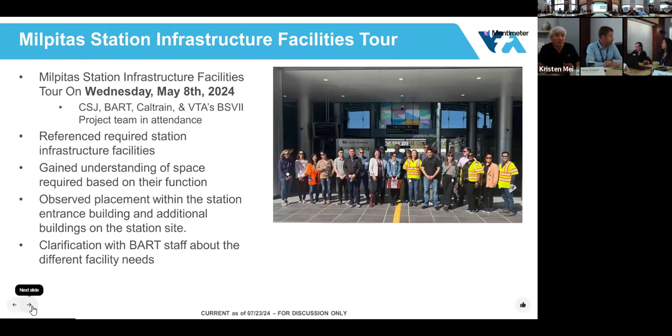Thank you to BART, if there's any BART members on the call, for hosting us and walking us through.

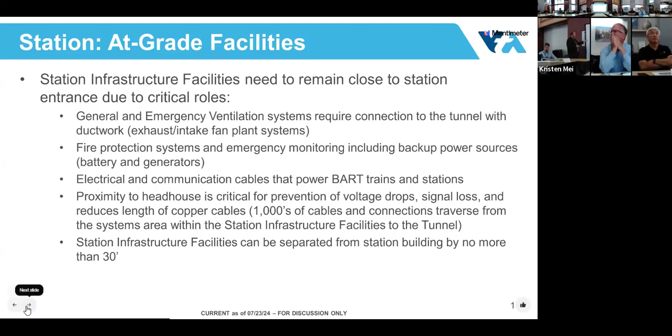The next slide shows all the things that essentially need to be at grade. We have to provide staircases that come up to grade, and ventilation systems that come out to the air. These things have to come up to the surface, we can't bury them. We've got to have fire department access, water valves and things like that have to be in that station head house, some restrooms up there, and our bike storage facilities in that area. Those are the things we're planning for in terms of the overall footprint of the station proper.

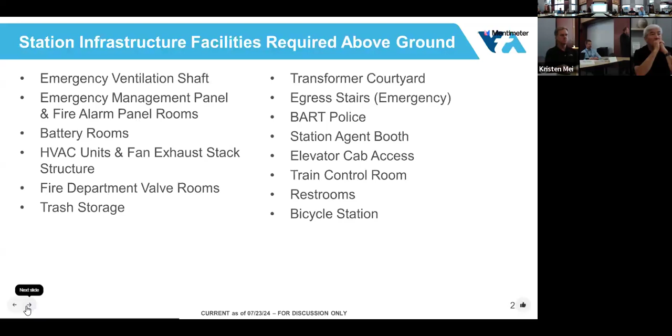Here, Kristen, do you want to help me? Thank you.

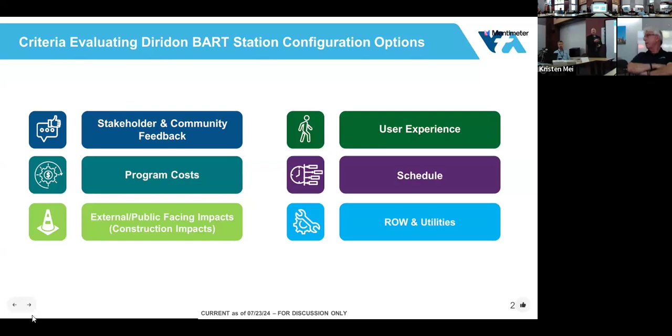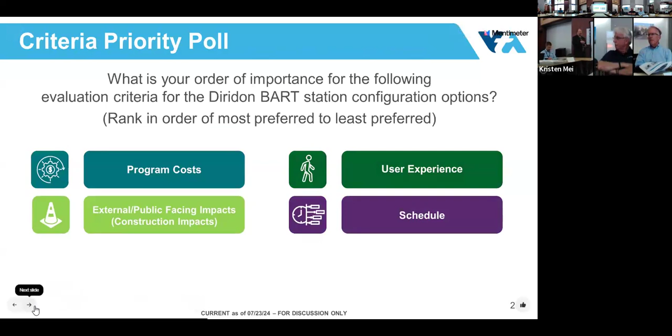So we're going to take a poll right now, and we want you guys to rank in order from most preferred to least preferred what are the things that are drivers for you. And while we're doing that poll, I can open it up to some questions.

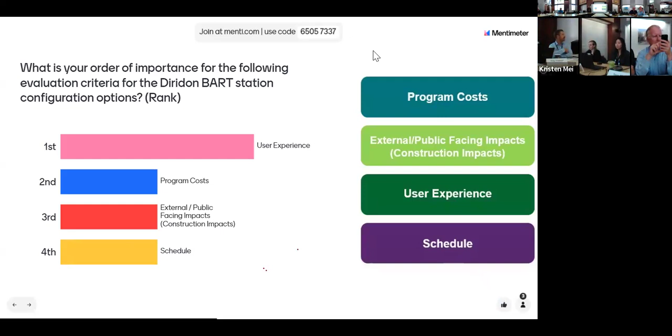I think you called on me to speak, so I'll give it a shot. First of all, I'm having a hell of a time hearing some of you speak in the Chamber of Commerce building. The mic doesn't pick you up all the time when you turn your head away, so realize that.

The second point is that we had at one time talked about an underground passageway from under the Diridon station over to the BART station, lining that with retail opportunities. What you have blocks that, it seems. At least I could not figure out how you were going to do it. In fact, this is all pretty opaque for people who are not there and able to understand what's going on.

So I will respond to the connection to the future intermodal station. We do have that in this presentation a little bit later, we'll get into that, that's the next topic, so we will present that. I will say that we do not have that area lined in retail, but we do have that connection option shown. Seems like you're losing an opportunity there. Do you have to come up out of the station to go across and then go back down to BART? So there's going to be 3 alternatives, and like I say, we have some very detailed slides that I'll show you after we get past the station.

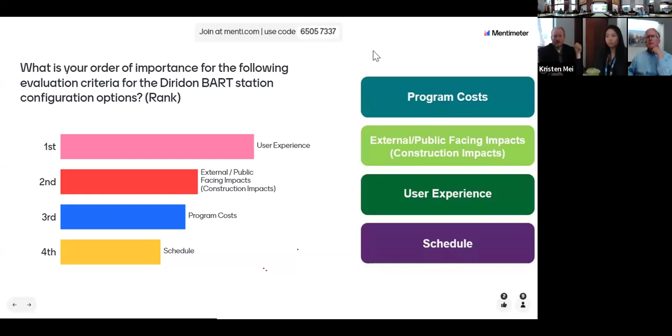Perfect, thank you. Yes, that's a great segue. Thank you for those who provided their input in Mentimeter. We're gonna move along here, but it looks like user experience is the preferred evaluation. And thanks everybody for taking, as Kristen mentioned, keep that app open because we've got 3 or 4 more questions we can use the app to answer. So we'll go on to the next slides.

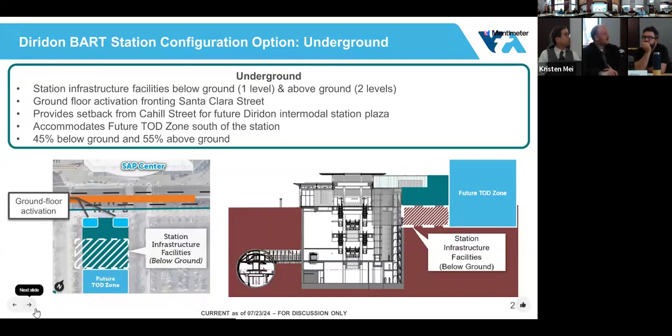Okay. So that's the underground option. We've got about 45% or so of all those critical infrastructure elements I talked about below grade, and about 50-55% above grade. So that kind of cuts it roughly in half. This is the optimum space for us to utilize here. So these are some of the things that those cover.

Let's go to the next one. Again, the next one is essentially an expanded station footprint. So we have a very similar scenario where we've got the future TOD zone. We've got a very large below grade facility, but we actually expand this into Cahill, towards Cahill.

So that creates a much wider structure for the station, which increases the cost of the program. But it does provide additional retail space, and that's one of the things we heard was requested - to provide some additional at-grade retail space. As commented earlier, there's a lot of open retail space downtown and all over the area that we're having a tough time to build. VTA is not an agency that builds retail, but we understand this is a desire of the community, so that's why we're putting this in here for your review.

And we put one square over here on Cahill. We could potentially put maybe a smaller square on Montgomery. It really depends on how this whole thing space plans out. And the TOD gets bigger here too - it would jump up to the 180 feet. So the original was like 150, and now we go to the 180 or so.

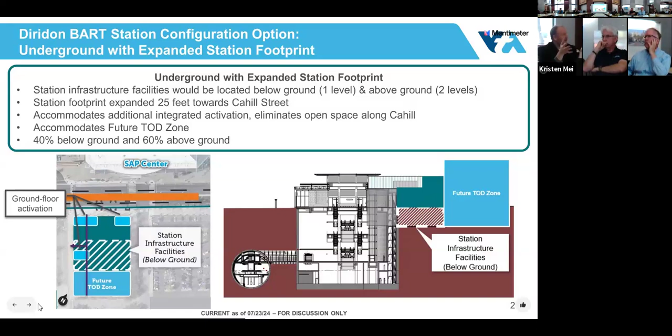Neither of the options remove the functionality of Montgomery returning to a southbound at the end terminus of the project. That's correct, right. So we're only talking about the station kind of footprint, and Cahill plus - yeah, right now. So that's the other option, and we'll go into some benefits and costs for all three. Then the last option was the one that we originally had, which is our baseline.

Again, that brings everything above grade. It's much easier to maintain. It's the least expensive option for the program. All of these batteries and large equipment pieces are at grade - we're able to drive in and utilize them and get them with a forklift instead of a crane. So operations-wise, BART does like this option the best because everything is at grade and easily accessible, instead of having things like elevators that need to take it down to the basement level.

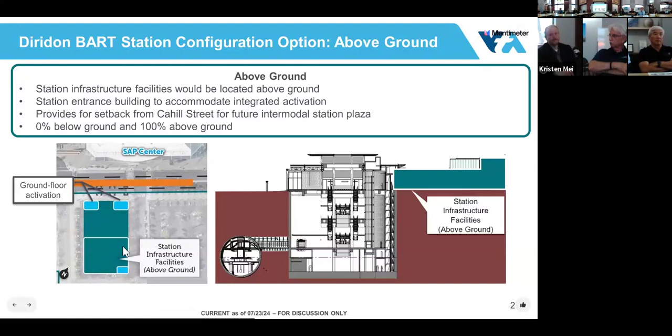We do try to optimize as much as we could in terms of retail space. Again, we do have the ground floor activation along Santa Clara as well as a small area over here. Then there's also some bike parking in this area here as well. So those are the three options we currently have. Let's go to the next slide.

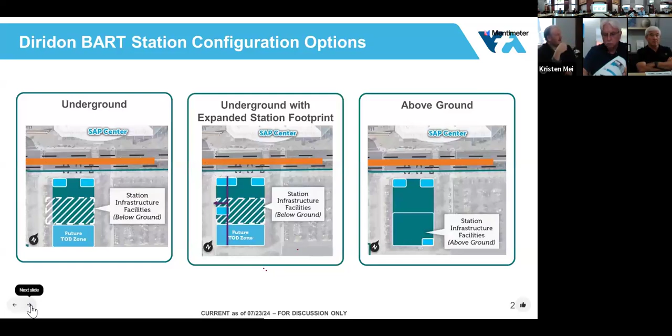Those are the three options we talked about. Let's go to the next slide, which talks a lot of information here. The underground scenario in terms of cost does cost quite a bit more than the above grade option - we're looking at approximately a $30 million increase by having this basement level. If we go with the widened footprint, then we're at about $50 million or so. So these are kind of significant impacts to the program. We've got a slight schedule increase in terms of just implementing this design configuration, but it would not delay the start of the job. We think there's enough float in the station construction itself that it wouldn't actually delay the opening day - we would just eat that schedule through the other activities that are happening.

We know that you guys reported back that the user experience is one of the primary drivers of this, so we've got a lot of user experience here that we talked about. The underground option does provide, with a lot less of this infrastructure at grade, a little bit more TOD, a little bit more community activity happening at grade. So that definitely is a positive, and it also allows for more of that TOD opportunity.

So those are the things that we've been weighing—the difference in Cahill as a user experience option, right?

Yeah, so one thing that we do think the underground scenario provides that the underground with the expansion footprint does not is a wider pavilion, a wider plaza on Cahill, which allows for more queuing and lines for people entering the system after events. With that wider paseo, people entering those fare gates can queue more easily—it'll be a lot more user friendly. Once we eat that space up with this TOD, you'll have a lot more congestion. So at least for day one, it's definitely easier to have that open public space between the station and the sidewalk. It'll be about 25 feet.

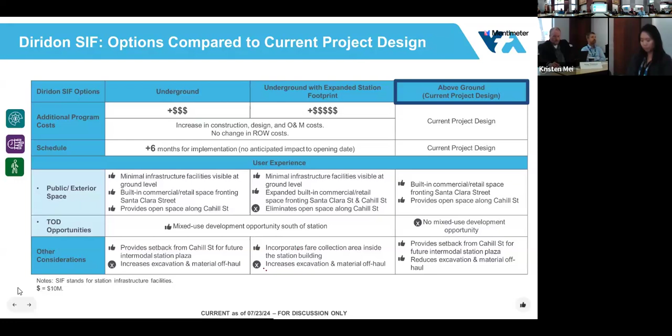And with our industry supporting those trips with money to the people who use them, that's going to convert a whole lot of ridership into the Diridon station that don't have a place to go. They've got to get to their jobs in Silicon Valley, not in San Francisco. A few will, but the majority are going to go to jobs in Silicon Valley, and they're going to need to transfer to Caltrain, the Altamont Express going the other direction, and so on, and light rail particularly, taking them to local jobs and buses.

What you've shown here makes it very difficult for that transfer to occur. You've got a blockage in the opportunity to have people come across that area in a tunnel, so there'd be direct access from light rail, which will be the heaviest used transportation mode in the future, to the BART system. Instead, you have to come up out of the ground, walk over, and then go back down into the ground. That's going to just frustrate riders, which we've all indicated is the optimum objective.

And when you talk about saving a few bucks, $50 million is chicken feed compared to what you're going to have to invest in the future to make this area reach its potential. You need to be designing for the long-term future, not for a budget constraint that's tomorrow. You got to fight through then and get your politicians out there to find the money, run the campaigns and find the money, but build to the optimum. This is discouraging to look at.

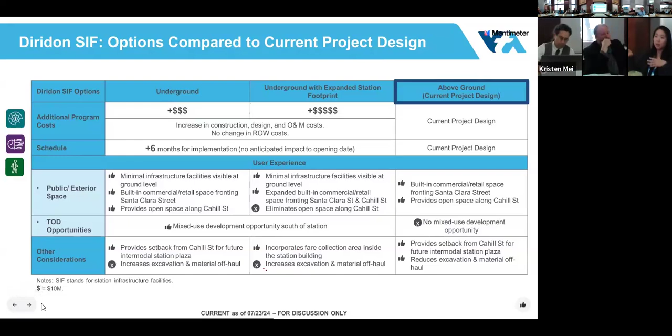Again, I've already covered most of this. Let's go to the next slide. So, in these three options, can you tell us what are the specific elements that you like between the three?

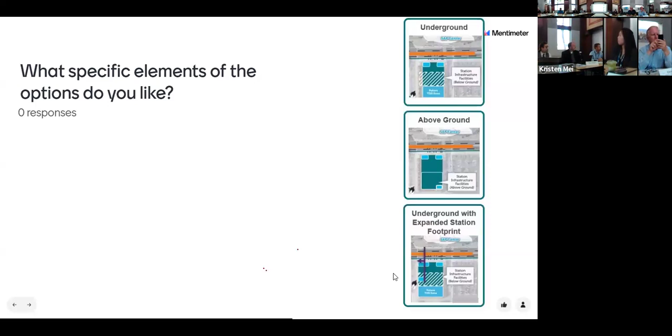Again, the underground does provide for the future TOD. The above ground does not. And then the underground, the last one is the expanded station footprint. If you guys can just focus on the station itself, we'll talk about the connection to the future Diridon station, or to the station expansion next. But this is really related to the station footprint itself, just within the footprint. This is meant to be a little bit more open-ended, so like retail or open space. You could use one of the optional words if you want to describe those features that Greg talked you through.

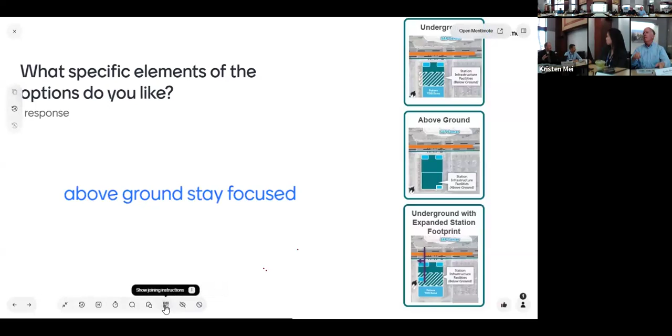Okay, so we're seeing residential TOD, so those are drivers. Above ground, stay focused. Okay.

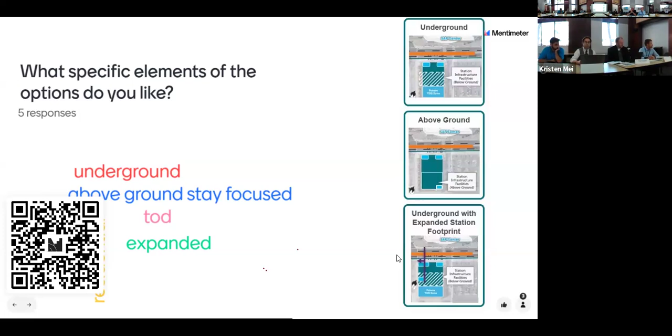These are words that we want to take as feedback to help the designers incorporate into the next iteration of what the station will be. We'll give it one more moment here.

Maintain current footprints, underground is highlighted and larger. That's getting a little bit more weight.

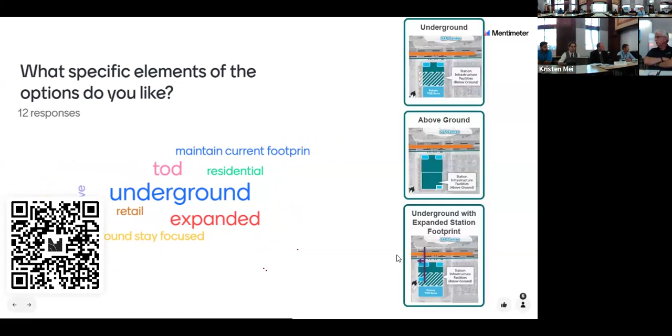Connectivity, like global trains. This is good. Awesome. I think we're going to have to move on, but thank you for that feedback. Appreciate it.

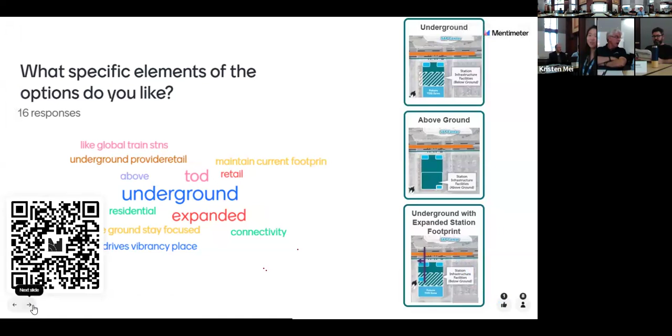Okay, so based on that, I guess this allows you to select which of these provide the best community-based solution. So if you would like to pick one over the other, you can select one, or you can select two, or you can select all three. Yes, you can select all that apply, so we can figure out how to do that. Or you can narrow your focus if you really feel strong, right? So it tells us all will meet the needs, or no, we think you should focus maybe on one or the other. Help us narrow it.

I was gonna pick both underground and underground expanded, but I couldn't do both, so it wouldn't let you multi-select. Oh, you just select one. Yeah, just for me. Was anyone else able to multi-select? No. Right, looks like it's leveled out. Thank you for that input there.

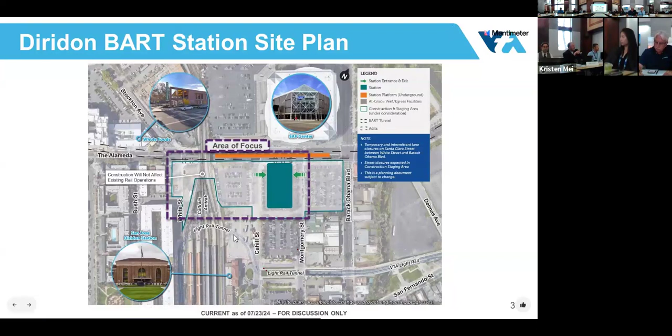So that's the current option, would be to do that. You exit out of the high-speed rail trains or any of the other Caltrain or other intermodal facilities, you walk across and then go back down into the tunnel.

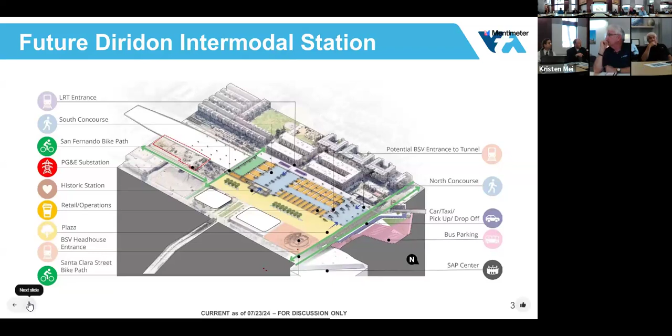So these are the 3 options. They've got a stacked scenario where the platforms are all above here, and then you have a connection where you walk out, walk across the pavilion, the plaza area, then go down the escalators and get on BART. So that would be one alternative, the above ground alternative.

The second option is the below ground alternative. That's when the intermodal station is a little bit lower, and they would provide an underground passageway that would lead into the basement level, the first level basement of the Diridon, of the BSV station. So that's option 2.

So the first option is at grade. The second option is they come in and tie into our head house. The third option would be for us to build our station platform in the tunnel a little bit longer and put a future connection point into that tunnel, allowing for a direct connection into the Diridon intermodal facility, using a gate. There would be a new station entrance area up there, installed as part of the future work.

And that would be from above grade, right? So we've got a cross section for that too, which shows that this is going to be a fairly deep connection. Then there'd be staircases and an elevator that come up, and escalators that come up to the intermodal station over here. So those are the 3 options.

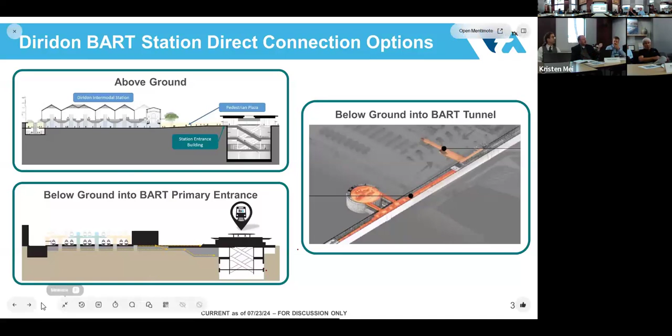And figure out how long it's gonna take to walk. Yes, we did. So is that faster or slower? Go to the next slides, we can talk a little bit about them in detail. Again, this is a blow up of that area. Keep going. Let's go to the slide with all the alternatives on it.

So the below ground BART tunnel alternative has the shortest travel time. If you have the above grade scenario, I think it's about a minute longer—a minute 20, I believe it. The Diridon intermodal did the modeling, and for the direct tunnel connection, since you're connecting to that extended platform, that's the most direct connection.

Oh, so that's the one that looks like it's long? It looks long, but since we have that extended platform, they're connecting directly into that. So based on that, the direct connection saves about—and they've modeled the entire station—but on average it saves about a minute 30 over the other options.

The below grade primary and the above ground are quite similar, because really you're walking from the intermodal over to the BART station either at grade or below grade, but a similar travel distance. Slightly quicker below grade, you save a bit of vertical, but then you're coming into the main BART platform rather than an extended platform, which is closer to the intermodal station. So any other specific questions on these, or should we go through the voting scenario?

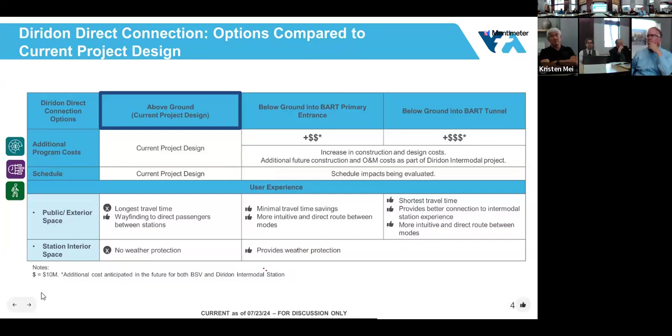And if people were to leave the station and come out and see they had retail available, some place to eat, the arena's across the street, there's a plaza—there'll be so many welcoming elements at grade. It may be worth considering a little more seriously, just for the experience itself, instead of just being in a tunnel the whole time, getting off a train and getting onto another train. Some people may have an hour before they have to catch a train, and I'd say being above grade would allow them to experience a bit of San Jose.

Are they mutually exclusive? Like, can you walk above grade if there's a tunnel? Yes, absolutely. So you can leave the Caltrain track, go out to the tunnel, the plaza area, and then go back in and take this entranceway if you wanted to. So they are not mutually exclusive—you are not locked into one certain area. Once you get into a BART fare gate zone though, then it costs you money to get in.

So yeah, if we did provide for the below grade scenario, as the gentleman on the call just mentioned, you could still do the above grade. Sure, you could absolutely do that.

If we don't make a decision to provide this direct tunnel connection now, we will not be able to do it in the future without a significant impact to the railroad's ability to operate. So that's one of the decisions we need to make fairly quickly - if we're going to spend the money on this, because if we don't put these steel liners in, if we don't extend the mezzanine, if we don't build out that interior elements, then we won't be able to do it without shutting down the BART system 20 years from now, which might take a year or two of operation, which we definitely do not want to do.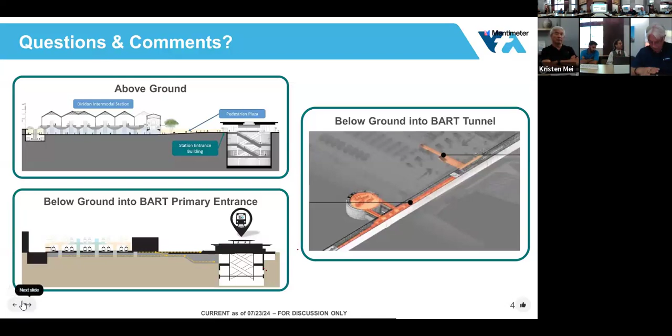Okay, we do have some feedback we can give here. So which of these options provides the most community-based solution? And it looks like you can only pick one, so choose your decision wisely. And if we want to open this up for additional feedback, maybe we can do that after the poll, because we did intend for you guys to be able to pick multiple solutions if you did want to do that. Can you give us the code one more time? I jumped out. Yes. Thank you.

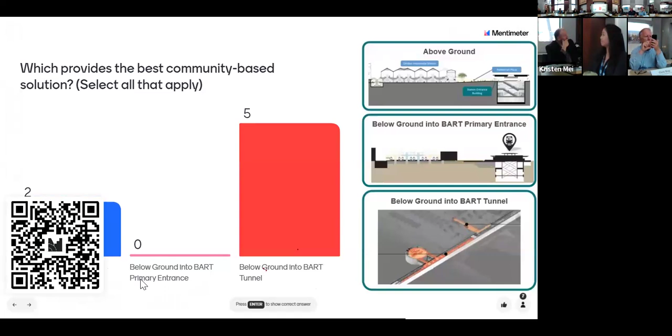There's a comment in the chat - look at the Dey Street Tunnel in New York City for a comparable example of an underground tunnel connecting two transit hubs. Right, looks like we're settling out here. Thank you.

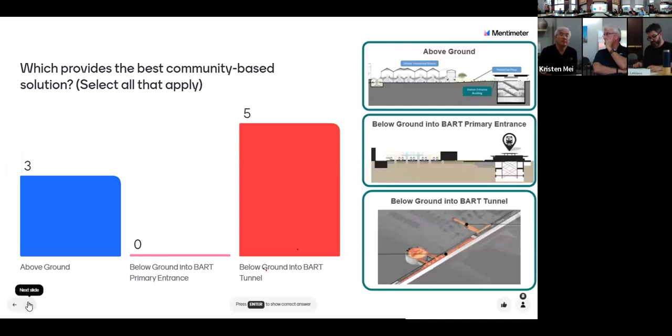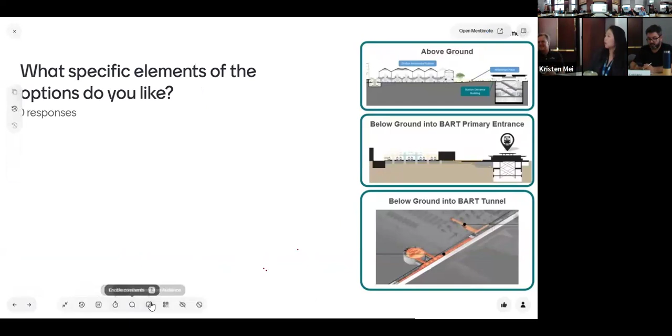Our next question: what specific elements of the options do you like? This is also that same word cloud format - if you like the plaza, if you like the tunnel. Anyone - the experience, the travel time of the user, is it the welcoming San Jose environment, what a plaza offers, speed of transfer, direct connections, outdoor experience.

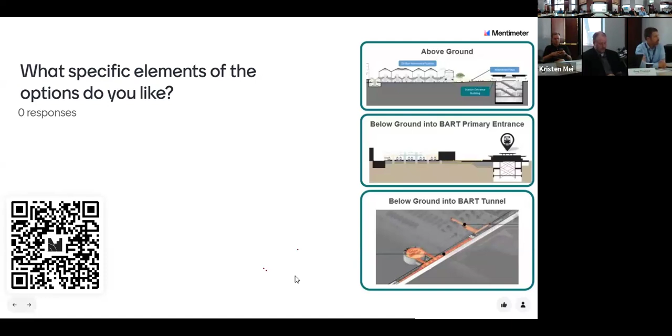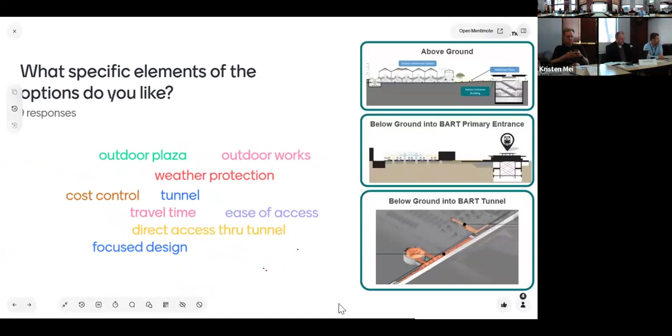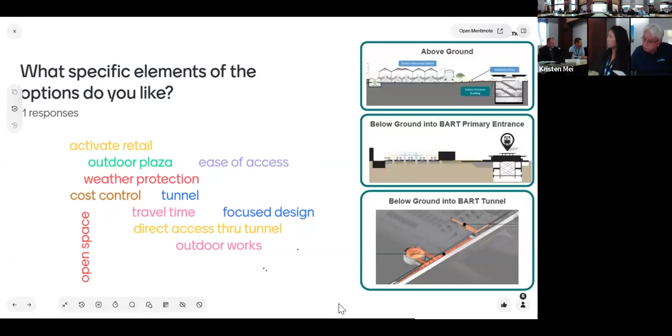Weather protection, tunnel, travel time. Cost control, and I assume that relates to the cheaper options. Ease of access. Outdoor plaza. Open space. The idea of activating retail or commercial space that can be leased.

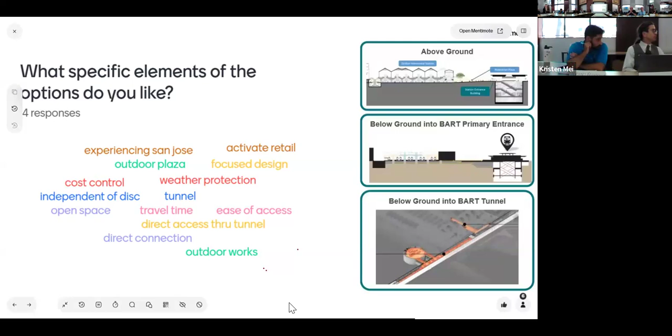While people are filling this out, we talked about capital costs, but there's also an operating cost element for any underground connection, correct? Yes, absolutely. So there's definitely a capital cost and an operating cost to have the tunnel. And there's future costs, right? Maintenance. There's going to be a lot of future costs for those underground connections that we wouldn't have if we just have the at-grade scenario.

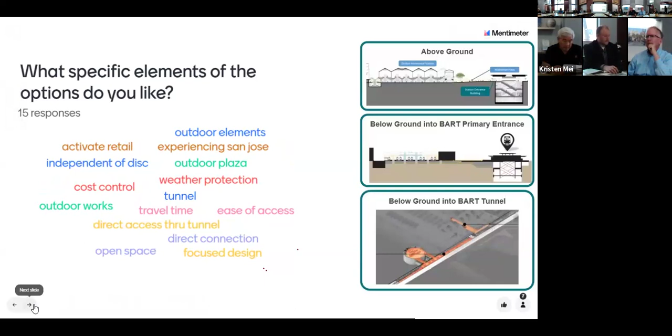Can any of you hear them? Yeah, go ahead, Rob. Nobody can hear you talking when you talk quietly and don't talk into the microphone. Is that for me or for Kristen? You can hear you, you're pretty loud, but Kristen, I can't hear her at all. I keep giving her the signal that I can't hear across the room, so you have to speak up, Kristen. Yes, I will yell, that's my term for it. Thank you, Rob, that's coming through now.

Okay, I know we have 2 minutes here, apologies if anyone has to hop off. We do have 2 more brief sections. Adriana is going to present an update on our downtown station specifically. Appreciate all your feedback for the Diridon station. I know that was a lot of options and information to take in. So Adriana, over to you.

Thank you, Kristen. I wanted to provide a brief update on our current status for the downtown station. There are 2 key elements that came out of the VTA Board of Directors referral. The first is ensuring that the head house, or station entrance building, strives for the highest level of iconic, context-sensitive design, including art and design cues from the surrounding downtown communities. We're addressing that request for the current station entrance building located between Market and First Street through our established design review committee process.

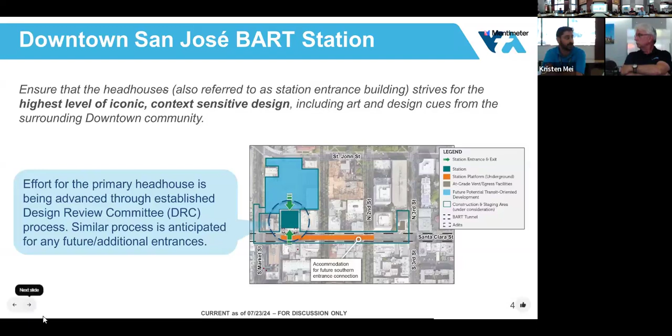We anticipate that any future station entrance for the downtown station would also go through a similar process. Right now we're really focusing on that station entrance building, and we've initiated that effort. For those not familiar, the design review committee is a group that meets to provide input on various station design elements, including aesthetic treatments, material finishes, landscaping, lighting, and potential location and integration of art. The actual installment of art is separate from what the FTA program can and will pay for. We went through a similar process back in 2021, which is where a lot of the renderings you've seen over the past years came from, and we've made some updates to our station designs, so we've reinitiated this effort.

For the downtown San Jose station specifically, the design review committee members include representatives from San Jose State University, the SJDA, the Chamber of Commerce, the Downtown Residents Association, and 3 San Jose staff members. We held a first meeting last June to gather input, feedback, and direction from our DRC members. Tony was one of the members who participated on that call, and I wanted to give him a few minutes to share his thoughts or feedback from that initial meeting.

Sure, thanks Adriana. This is really an impactful station for us, the Chamber, because it's across the street and in the center of the downtown area. So we looked at some options and really liked one that popped up, a section with a barrel vault. It emulates a lot of things around town. We had domes at the cathedral, that's a project of mine so I'm very passionate about it. The old courthouse used to have domes too. So we have history around domes in San Jose, and having that curved ceiling or roof structure helps with drainage.

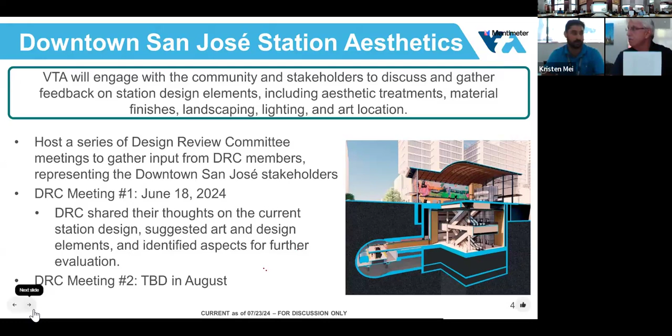And we'll make sure to come back to this group and continue to provide updates as that process advances. As Tony mentioned, some of the key themes and feedback that we received are, what makes San Jose Station unique? This is going to be a gateway to San Jose Station for many. How can this be celebrated in the station design?

Past feedback that was provided was celebrating the actual structure of the station. So our station is a very similar design to the Diridon in that it's got a large circular drum. You'll have two escalators to get down to the lower point.

As Tony again mentioned, there was a lot of discussion about how we use light at the station, both natural light, making sure that it's being used to provide an environment that is enjoyable for passengers. Also as part of wayfinding, to let people know when they get out of the train and out of the tunnel, they'll see natural light and it'll help them get back up to the surface.

We also talked about artificial light, and one of the things in particular that was mentioned is San Jose's illuminating downtown effort. So wanting to make sure that this station contributes and participates in that effort. Making sure we're looking at this not just from the daylight standpoint, but what opportunities there might be to really activate the station in those darker hours.

And then we talked about some of these grand gestures and making the station iconic and timeless. Tony, as you mentioned, some of these arches and domes are something that we have seen in San Jose, as well as some of the other stations around the world that have stood out and really stand the test of time. So that is some of the feedback that we are working to incorporate.

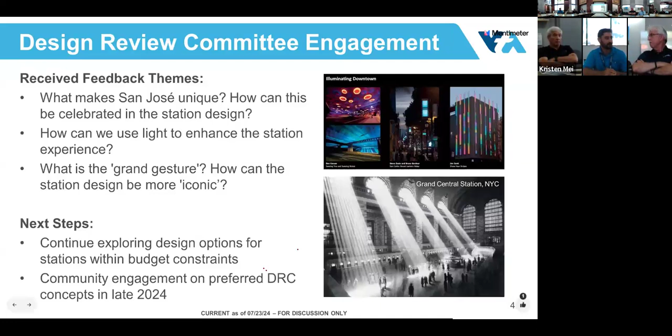But we'll continue going through this process, and as we did with our 2021 effort, we'll work with the design review committees to identify a few key concepts that we then want to bring to the larger community, and we're anticipating that will happen later this year.

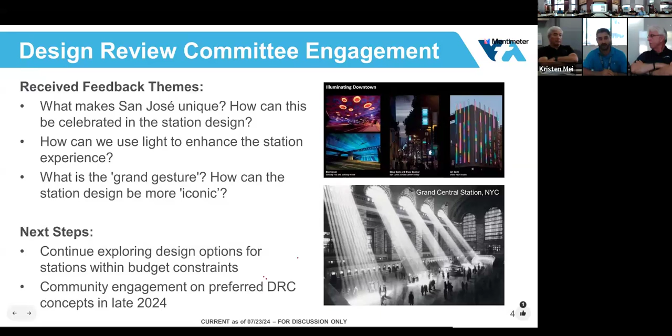The next part of the VTA Board of Directors referral was to really look at opportunities for a south station entrance. So that would be an entrance on the south side of Santa Clara Street. We recognize there are a lot of activities and attractions on the south side, including SJSU, including the light rail, and of course, City Hall.

And so the very first ask was to establish a timeline and a process for how we could deliver a south entrance separate from our BART Phase 2 program. Again, this south entrance is not cleared as part of our program. We definitely don't want to derail or jeopardize our process for getting full funding grant agreement from the FTA, but we are looking at opportunities to advance this separately, in such a way that it could be built and open at the same time as the other stations.

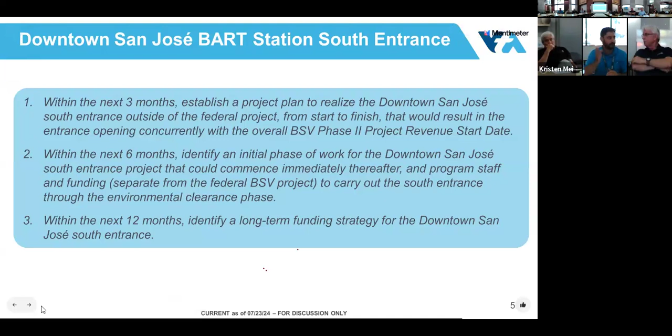So it's more of, on our end, we know it's going to need to be a separate project. In terms of what the public will see, this will be just part of the station when it opens. And so we've taken an initial stab at that. I'll flash that up on the next slide.

And so as you can see here, we identify that there's some planning and funding strategy. We'll need to identify how we're going to pay for not just the capital cost of construction, but also the planning and the clearance and the engineering that all needs to go into it.

We anticipate that we could start environmental clearance as early as sometime next year, and that would be a multi-year effort. The south side of Santa Clara Street is a historic district, and that certainly poses some additional challenges from an environmental clearance standpoint. This project will need to go through federal environmental clearance regardless of whether federal funds are used, because it connects to a federal project. But overall, we feel confident this could be delivered in time for opening revenue service in 2037.

The next part of the ask was to develop an approach and work plan for things we can start working on immediately. We're working to establish a task force, primarily with City of San Jose directors from various departments, as well as key stakeholders in the downtown San Jose station area. That task force will meet several times over the next 5 or so months. The first task is to identify and screen potentially feasible alternatives, identify a couple concepts that VTA can advance and tease out further, and then ultimately select a preferred option to bring to the City of San Jose City Council and VTA Board of Directors for concurrence.